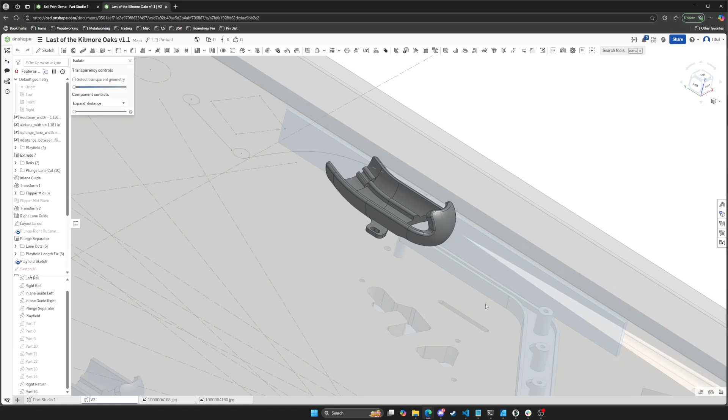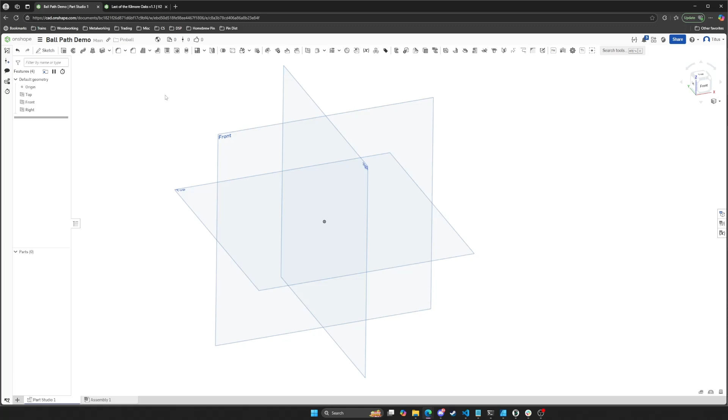Starting off, let's begin by defining the profile of our ball path. By profile, I mean if you were to picture the ball path in your mind and take a thin slice of it, what would that thin slice look like? That's what we're going to draw. So I'm going to start by making a sketch.

Because we're designing this around a pinball, I'm going to draw a pinball first. Technically, the dimension of a pinball is 1 1/16 of an inch, but a quick shorthand for that is 27 millimeters. Now we're not going to illustrate this, so I'm going to hit Q, and that will turn that into a construction line for us to reference.

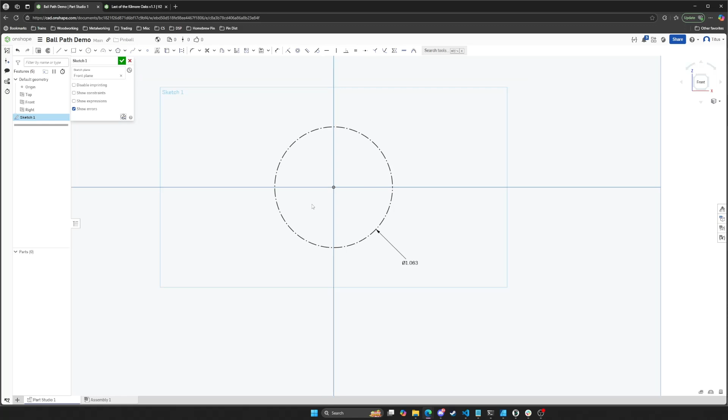So there's our pinball, and we can decide what kind of shape do we want to be around this. Do we want there to be a square or a circle or whatnot? Just for the sake of simplicity, I'm going to choose a circle. So I'm going to start here, and I'm going to key it off of this. The center dot here is the center of our pinball.

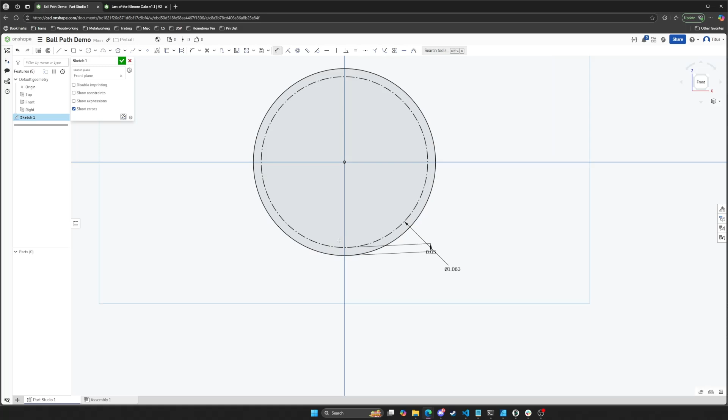So there's two things that we want to draw, the inner walls and the outer walls. I will start here with the inner wall, and we'll leave a little bit of a gap just so that there's a bit of space there. Then I will draw the outer wall, and I will dimension this as well to maybe 1/8 of an inch. Now let me turn those planes off.

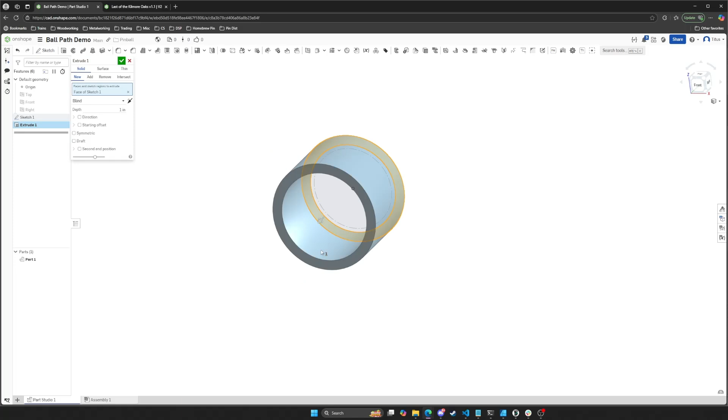If we were to take this profile and extrude it, you can see that fundamentally we end up with kind of a cylinder. It's a tube or a pipe almost, which isn't actually that useful, at least not for this case.

We only want half, and so what I'm going to do is add a line to our geometry here. That's going to effectively cut this in half. Now if I extrude that, you can see that we kind of get what's starting to look a bit like a ball path.

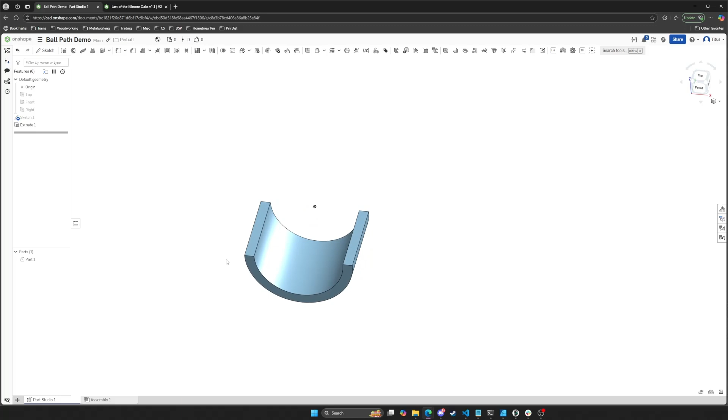Now, the challenge at this point is if you've made it this far, everything else should be pretty straightforward. But the challenge is, how do we make this follow a curve? Because we don't just want it to go straight. Maybe we want it to bend around to some angle to go in some place.

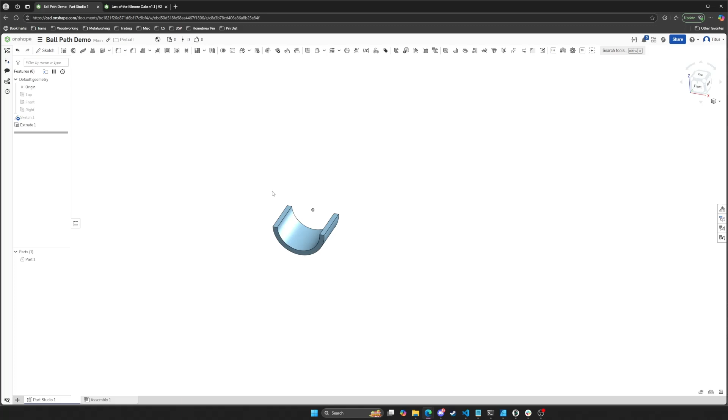So in order to do that, there is this tool in Onshape called Sweep. It's the third one over - Extrude, Revolve, Sweep. What Sweep does is it will take a profile. This face here that I've highlighted orange, that's a profile. It'll take that and make this face follow a path. So we need a path and we need a face, and then we can sweep.

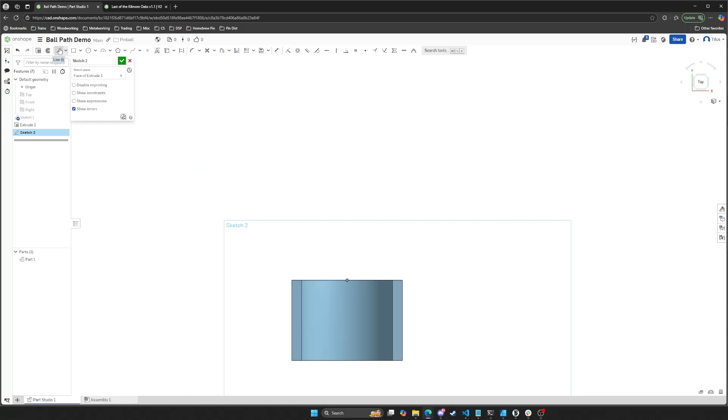So I'm going to start by making a new sketch, and I'll start here on the center of our ball path. Now there's a bunch of tools that we could use. If I just started with a line, for example, let's say that I made a line there.

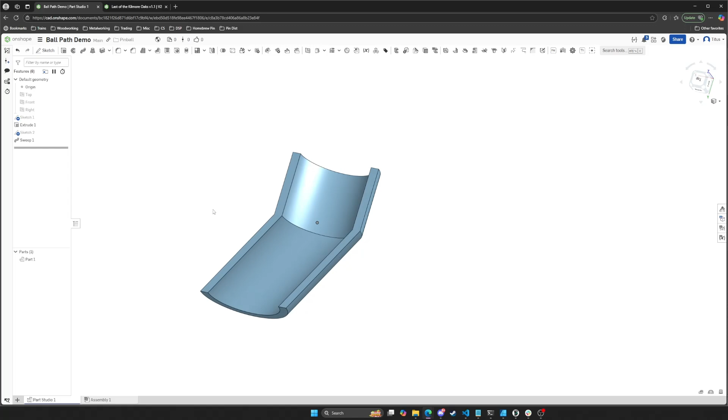This is going to be weird, but what I could do here is take this profile and say sweep this profile along that path. This isn't usable, but I'm just demonstrating what happens and how sweep works. You can see that it's taken our profile and it's basically followed along that path. Now we can use this to our advantage by doing more complex curves.

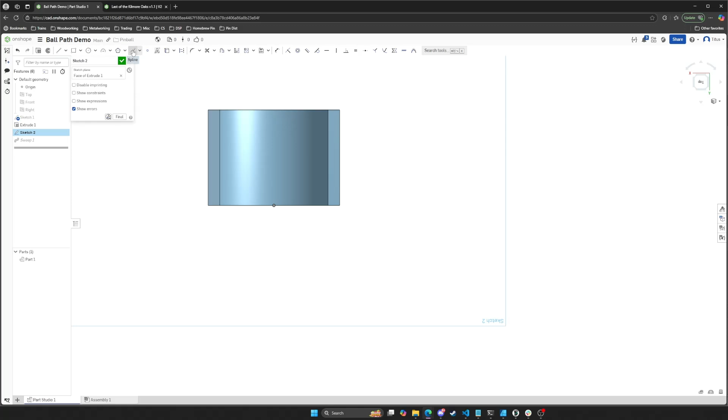It doesn't have to be a straight line like this, and in fact, I'm going to delete that. There's a couple of tools that we could use up here, and there's a number of ways that you could do this. The one that I like is spline. So I'm going to select spline, and then I'll just do that.

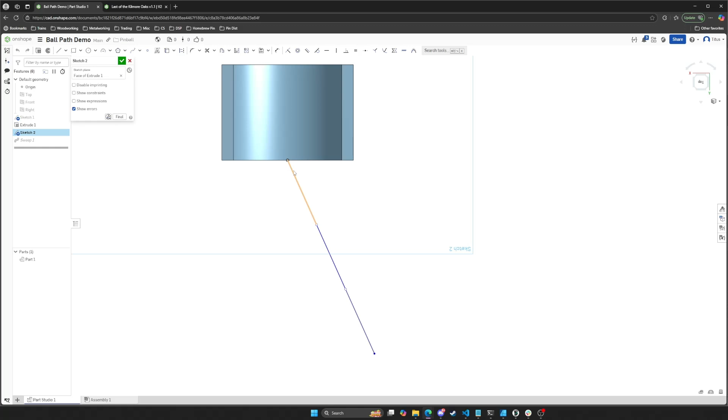If we do this though, you may notice I need to reselect this. You may notice that we end up with the same thing. However, the superpower of spline is now if you look at this line, you can see these white dots. The way spline works is on either end, there will be these handles, and if you grab the handle and move it around, you can curve the line.

So let's say that I do that, and I do that, and we go back and look, and you can see that we're starting to get kind of a curved ball path. However, there's a couple of problems with this.

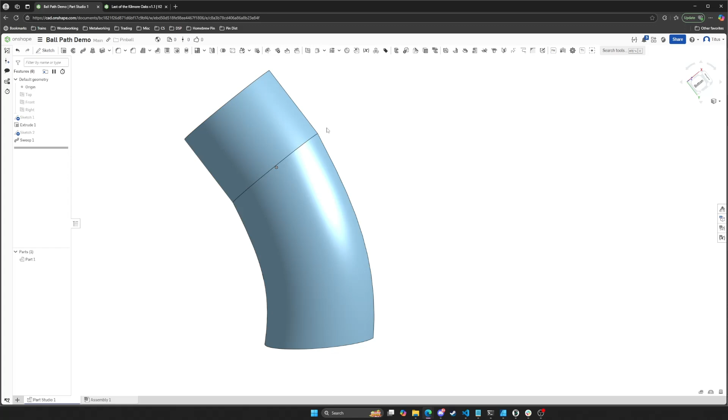One is that you can see over here, we still have this point right here. If I zoom in, you can see it comes to a point, and sure enough, if you look at it, you can see it's not entirely smooth. It kind of clunks in there.

The second thing that's kind of weird is, at least at the moment, we don't know what angle this face is relative to that face right there. Well, one of the neat things about these handles is that you can apply both dimension and constraints to them.

Let me show you that. Let's say that we want this curve to be perfectly in line with this piece that we already have so that the ball smoothly flows from here into this curve here. There are a number of constraints, but the one I'm going to use is parallel, and we can say that this handle here is parallel with the ball path that we're coming from. You can see there it's snapped.

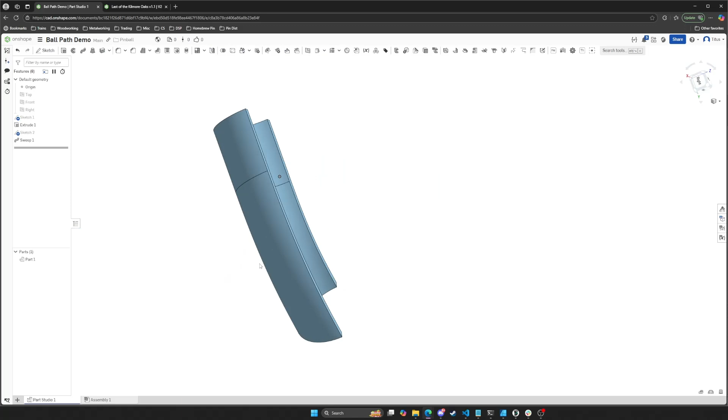This same trick also works with other constraints, so any of these other constraints up here, but the one that I also find useful is that these handles can be dimensioned. So I'm going to press D, which is the same as this dimension tool, and we can click the two handles, and then describe an angle between them.

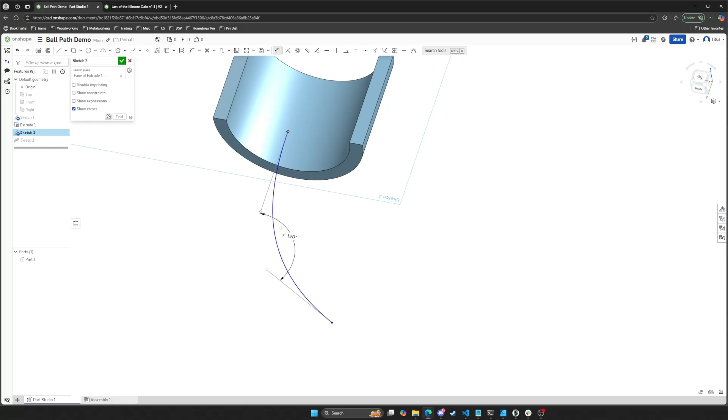Let's say I want this corner to be exactly 60 degrees. If I type in 60 degrees, it gives me some weird thing because it's bending it. So really I need to describe it as 180 degrees minus 60 degrees, which is 120 - I should have just done that in my head. Now what has happened is I have a piece where the entry is straight, and this face right here is exactly 60 degrees of a bend from that entry point.

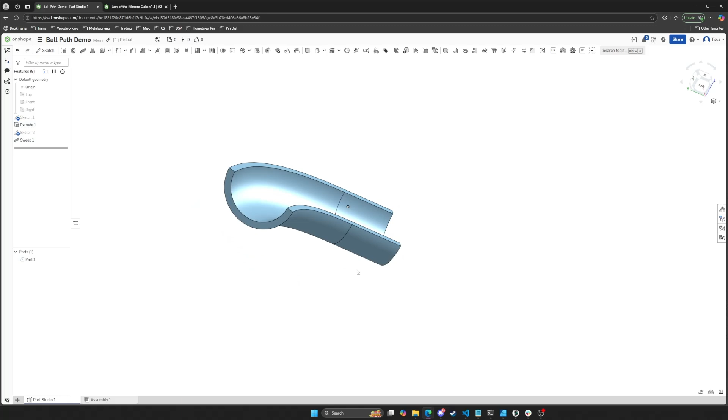So both of these techniques, the constraints as well as the angles, can let you really control the kind of thing that you are generating. Let's talk about some other tricks, but what I just showed there, maybe that will be enough for you to get started. Everything else from here on out is all gravy and some additional techniques for you to try.

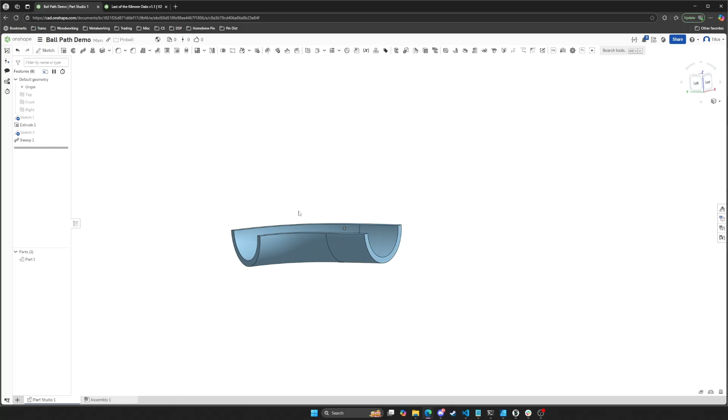First up on other techniques: sometimes when there are corners, if the ball is coming down fast, screaming down here, you may want to add, if I turn it over here, an extra guard that comes up higher to keep it in. So just to demonstrate this, I'm going to bring that out another inch so we can see it a little easier. There are a few ways to do that, which I can show you.

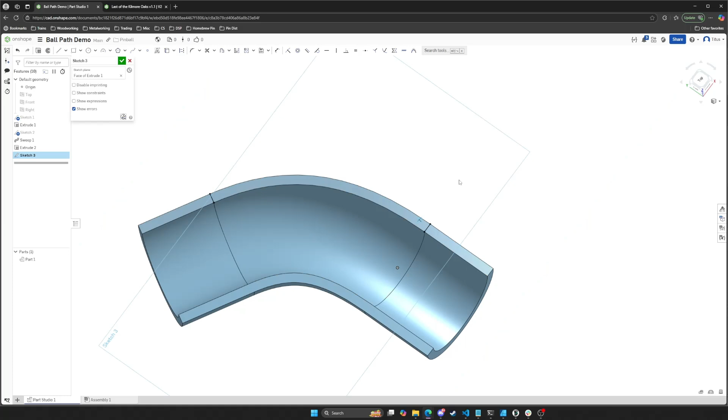One way is that we could just create a sketch on this top plane here, and then maybe select those points and those points, and we extrude upwards. This is okay, all right? And so we can bring it up just a little bit. So that's certainly one way to do it.

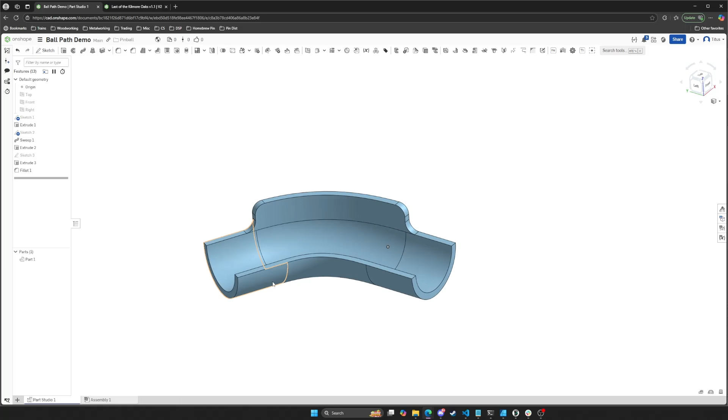And if we fillet it off of the corners here, that would probably look okay. Maybe that could be a little more round, right? So that's kind of okay, that is certainly one way to do it. I'm going to undo that though.

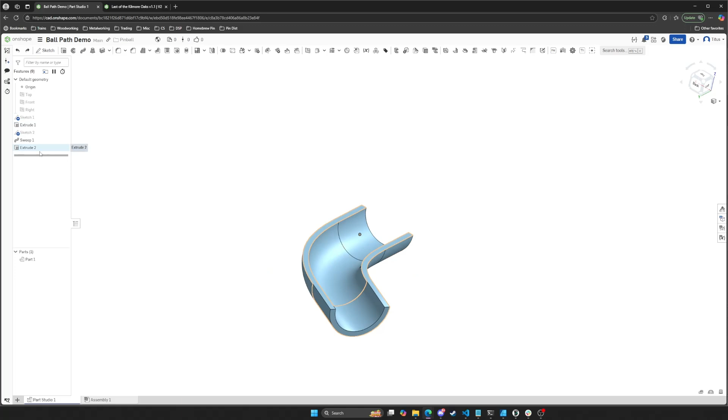Another way to do it is to adjust the sweep profile. And if we're doing that, we could potentially make it bend in a little bit or give it some other character. So I'm going to go back to editing this profile that we started with, and go back in history - here, this is the sketch where we drew our path.

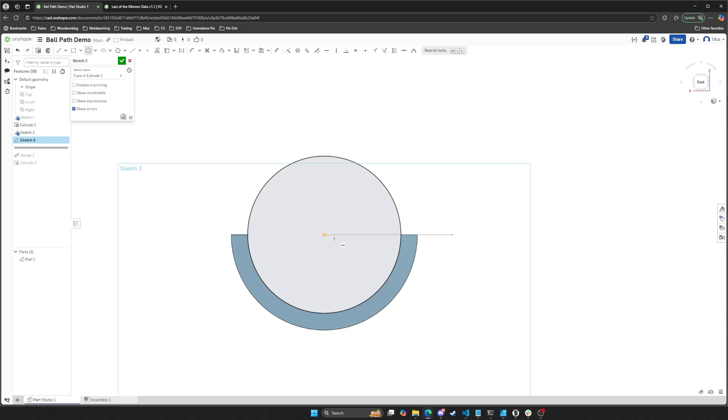What I'm going to do is inject a new sketch into history here. This part that I'm highlighting is the profile that we have swept. We can extend that profile. So I'm going to grab the circle tool and anchor it on that point, then draw a new circle - it's important to get those aligned - onto that point.

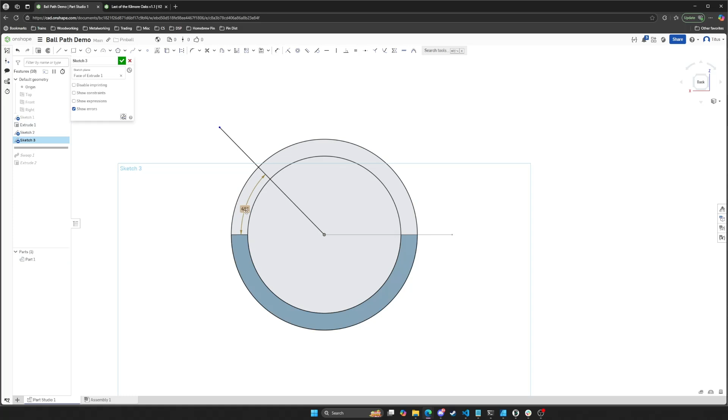Let's say we want to keep some portion of the wall up here. What we could do is draw a line and then dimension that. I wanted to adjust the angle, and so we can control the angle here. Maybe we want to make it 45, or maybe that's too much, and we want to make it 30. It's really whatever look you're going for.

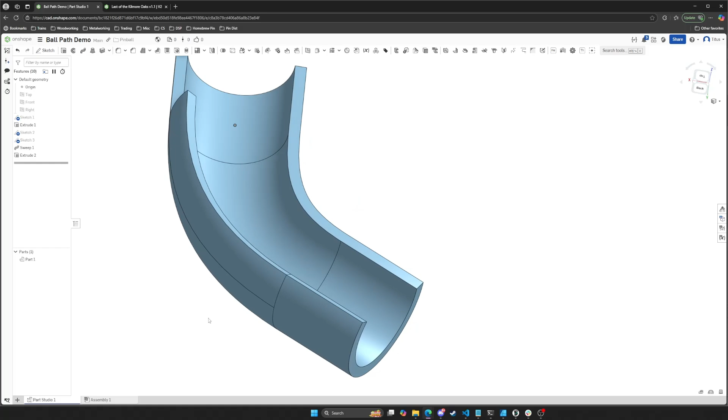I'll go for 35. Okay, so now when we perform this sweep, instead of selecting just this face, we could also select this extra little piece that we created, which gives us that. And so now we've got this kind of nifty extra little wall coming up. You can see when I extruded that, it kept it in there.

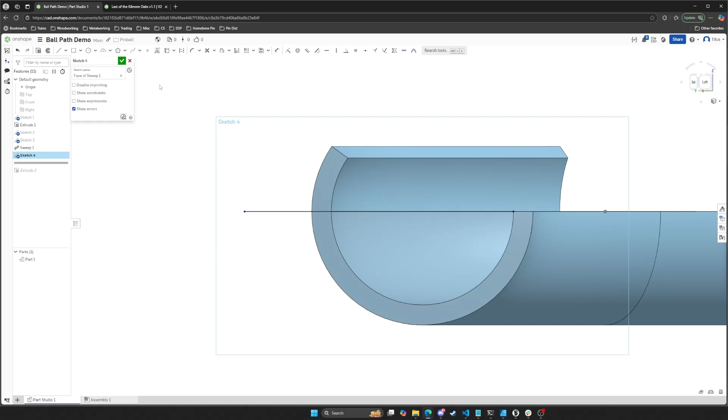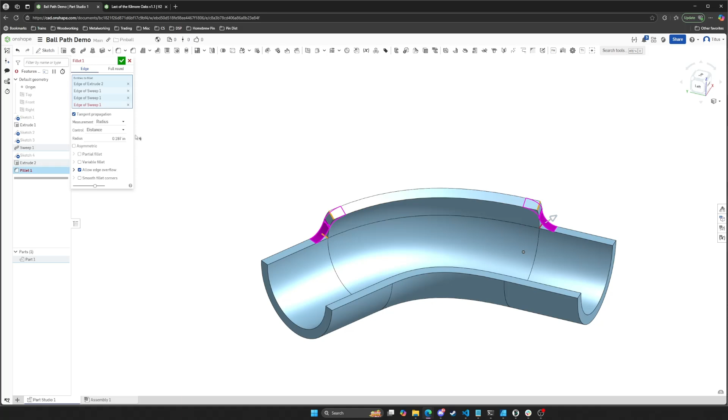So I'm going to go back and sketch on this face because I only want it to be on the corner, kind of doing like we did earlier where I'm just going to draw a line. This extrusion will just be for that lower section down there. Now we've got this nice embankment, and we could also fillet that. Whoa, I am selecting too many things here - the reason it's purple is because these fillets are overlapping each other, so I'm just going to make it a little smaller. There we go.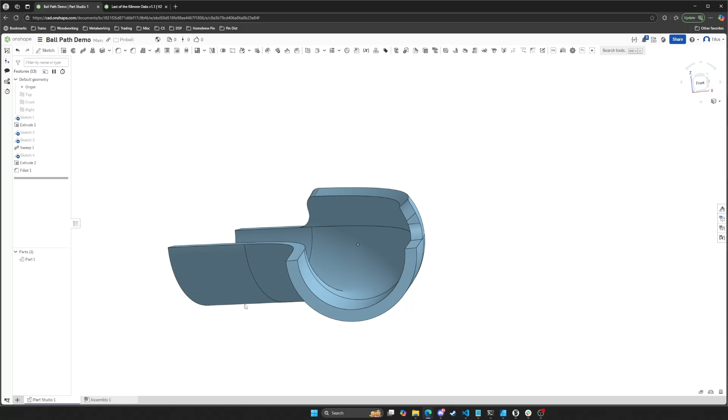So this is another way to do it, and the advantage of using the profile is that now the whole thing is curved - you can see not only is this bottom part curved, but then it curves up, like it's hugging the ball. So it's not that one is right and the other is wrong, it's two different looks, and you can decide how you want to approach that.